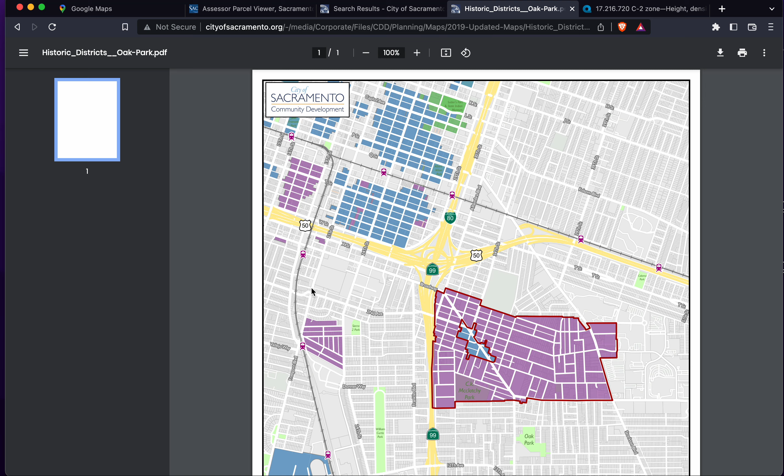If we look at this one, this is Broadway. There's this little triangle, and our land is somewhere here, and it looks like we are outside of this one. So not really sure, but it looks like we are.

The purple areas are surveys in progress, so that means there's no impact yet. The blue areas are the ones that have a historic guideline that's been adopted, and that's somewhere in this area.

Since we're far away from the blue, our lot is somewhere over here, I believe, or maybe here, so somewhere over here. I don't think we're impacted by this historic district of Oak Park.

If you look at this historic district maps, I don't see anything here about Stockton or Broadway, just Oak Park, so I think we're safe with historic district.

Historic districts affect building height, design, and everything like that. We could also look at business districts, so let's look at the business district improvement or design guidelines.

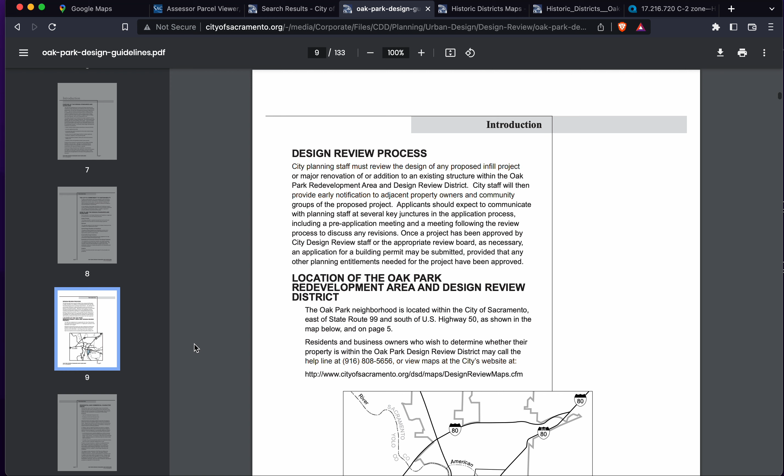Here you go, that's that one. That's too big, so here's Oak Park. Just look, maybe, oh here you go, here's another one. Our land on Broadway is somewhere over here, right?

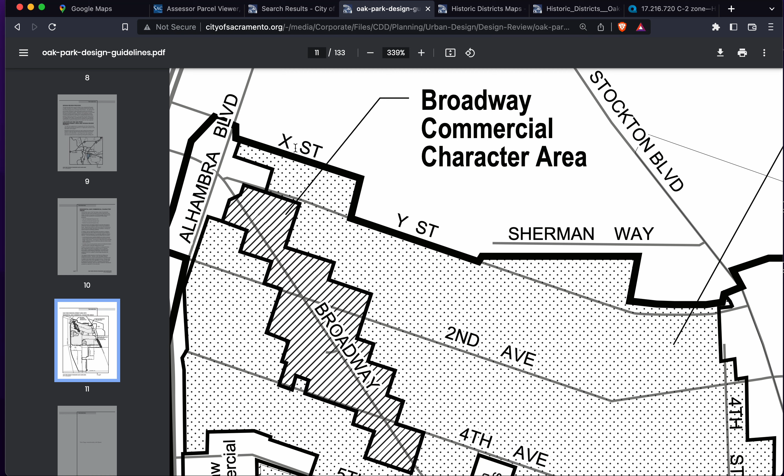It's somewhere over here, there's no other cross street here. So we may be within this Broadway commercial character area. Let's look at the Broadway commercial character area. So let's go back again.

Broadway commercial character is page 68, so let's go into this page and look at this one.

Let's use page 68... what page is this? Page 30 and page 66. So here's the commercial design guidelines, and we want to look at the Broadway section. Here's the Broadway commercial character area. You've got to read through this and look at the design guidelines.

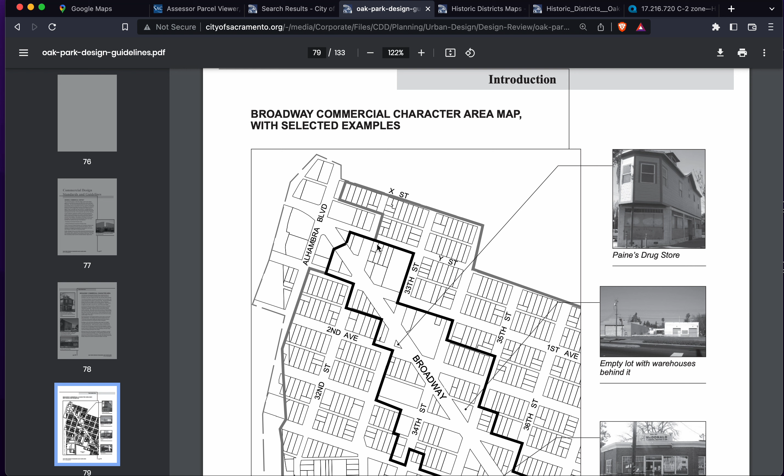So here's another map, and here is 35th, 34th is here, and our land, I believe, is somewhere over here. So I think we are outside of the Broadway district, since this dark area is Broadway and our land is outside of that.

So from Broadway, we got one, Y Street. If we look at our assessor map, here's Broadway, here's 34th, we got 2nd Avenue, and we got 1st Avenue here.

So let's look at 1st Avenue and 2nd Avenue. It looks like we are outside. So this is 34th, I believe. Here's 1st, this is the alley, this is 2nd Avenue, so our land is right outside of it. So it's not in Broadway. That means it's in Oak Park.

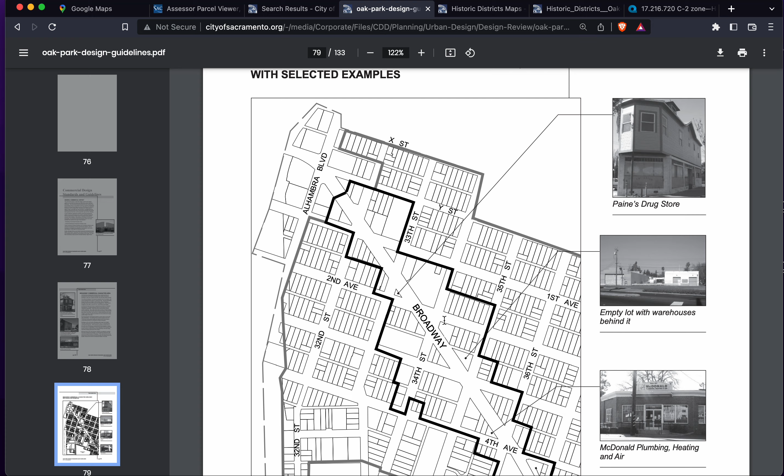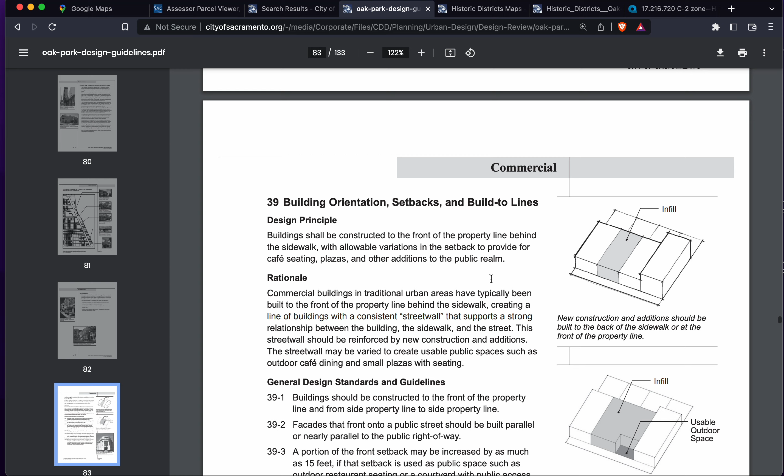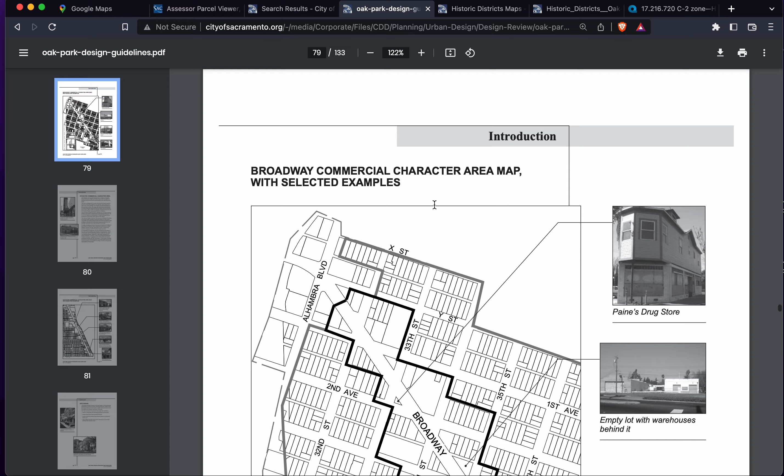So let's look at the Oak Park design guideline. I believe this is now Oak Park. So, Stockton commercial area. So we are not in the Broadway commercial area anymore, we are now in the Oak Park.

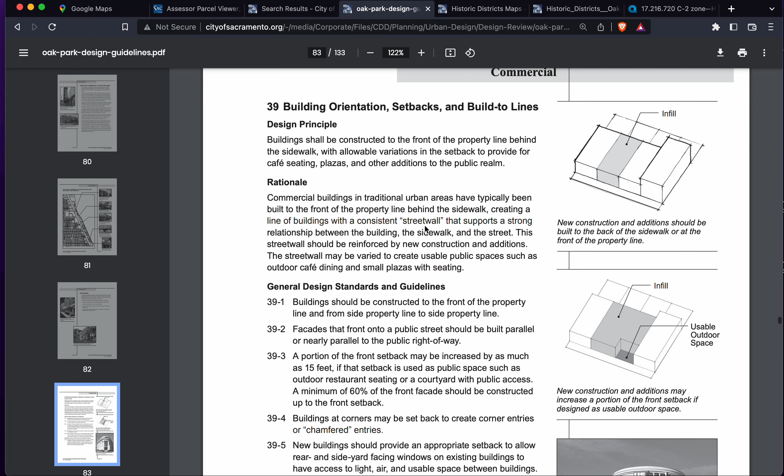So let's look at Oak Park building orientation. You can put usable space. You must directly address the sidewalk, but you can also do an outdoor usable space.

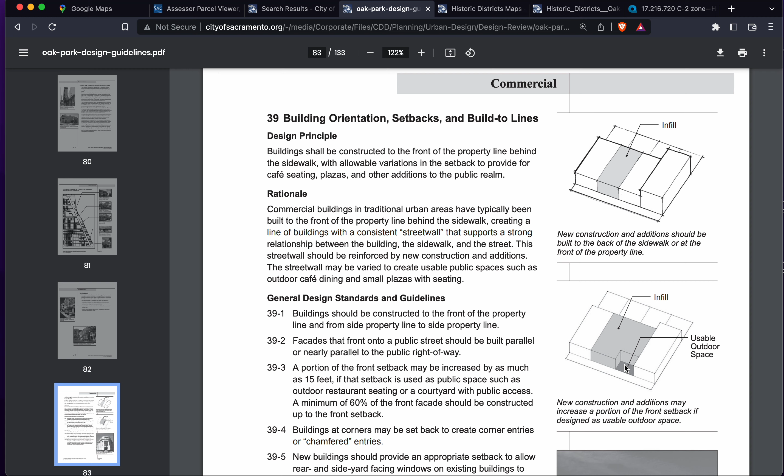Here are the design guidelines: buildings should be constructed to the front of the property. Facades facing the front public street should be built parallel to the public right-of-way, which is the sidewalk. A portion of the front setback may be increased by as much as 15 feet to accommodate restaurant seating or a courtyard. Building corners may be set back to create corner entries or a chamfer, meaning if you have a corner, you can have a 45-degree chamfer.

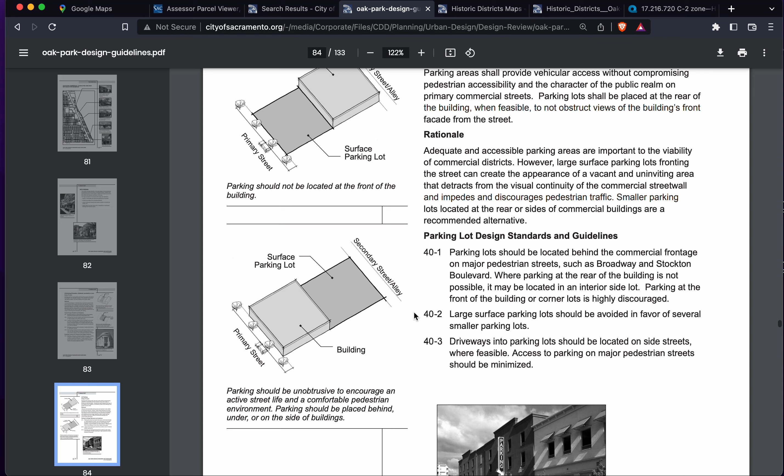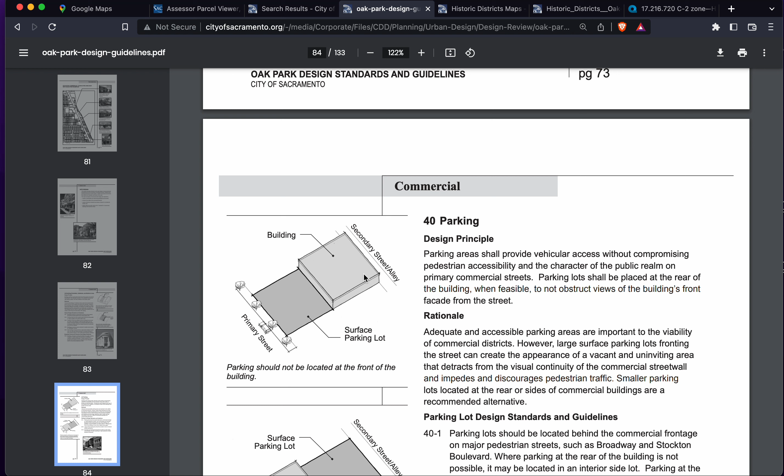Here's Broadway, and we also wanted to look at parking, since parking impacts our land, so we want to look at that. Parking says it should not be located at the front of the building, so we can't put parking there. We want to put parking by the secondary street or the alley.

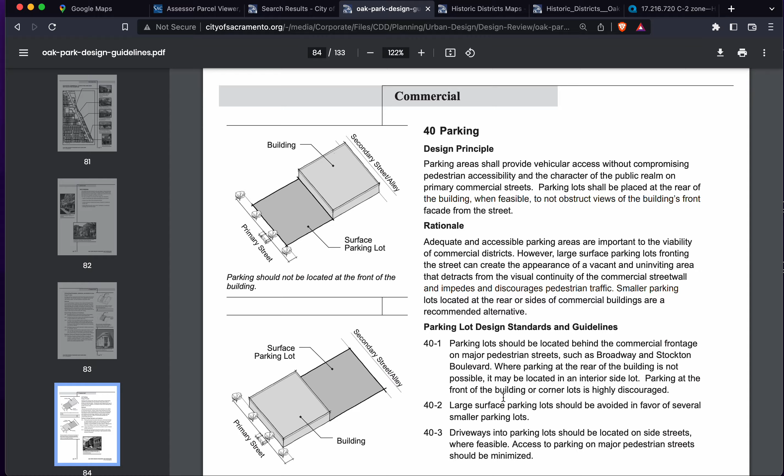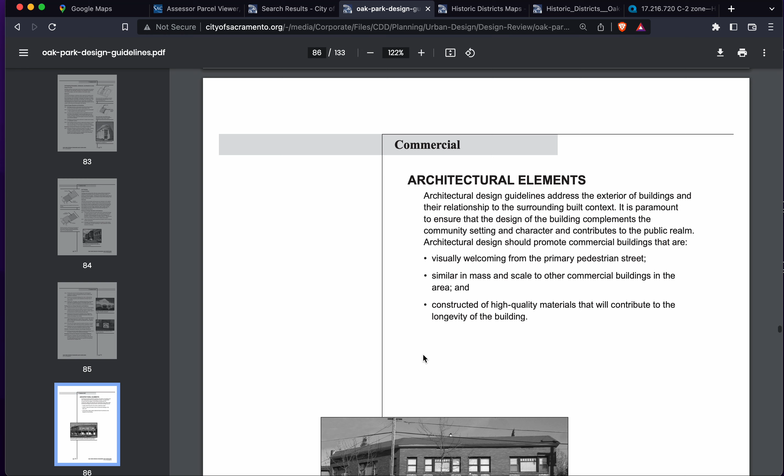Looking for building heights also. So, parking structure design guidelines, entry off Broadway. I don't see anything architectural, so maybe there are going to be some height restrictions here. There you go, building height, massing and scale. Does it say anything about the height? You have to read through this.

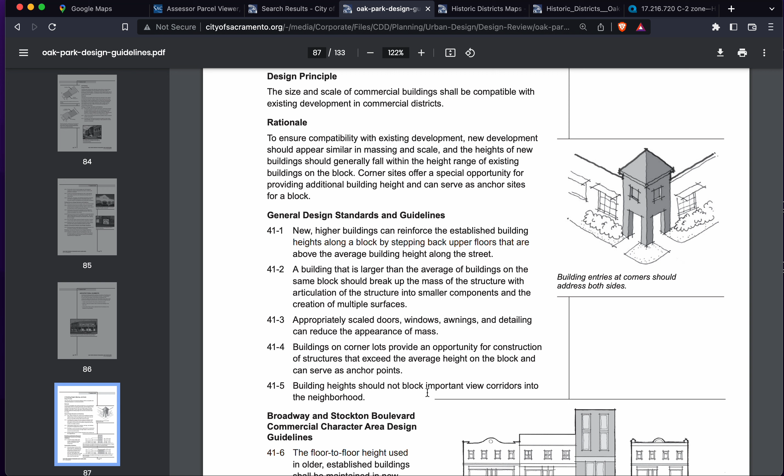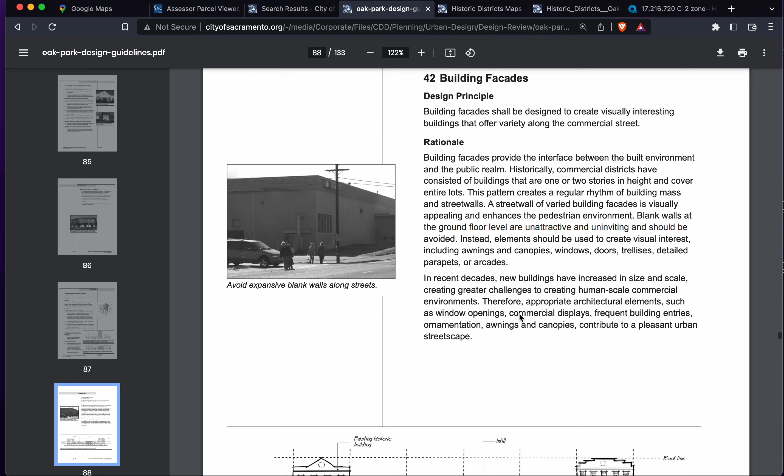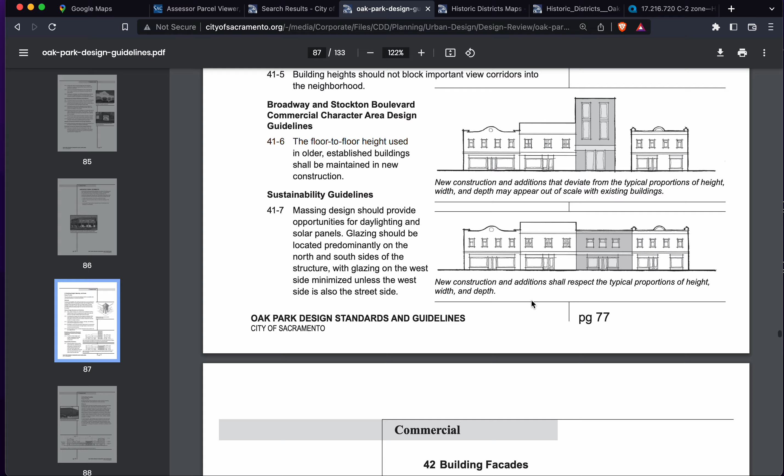It should not block important views. Floor to floor height used in older buildings, massing design should be consistent, building facades rationale. So it looks like, if you read through this, the height is basically going to be: don't go higher than something existing. I don't see anything that establishes a specific building height.

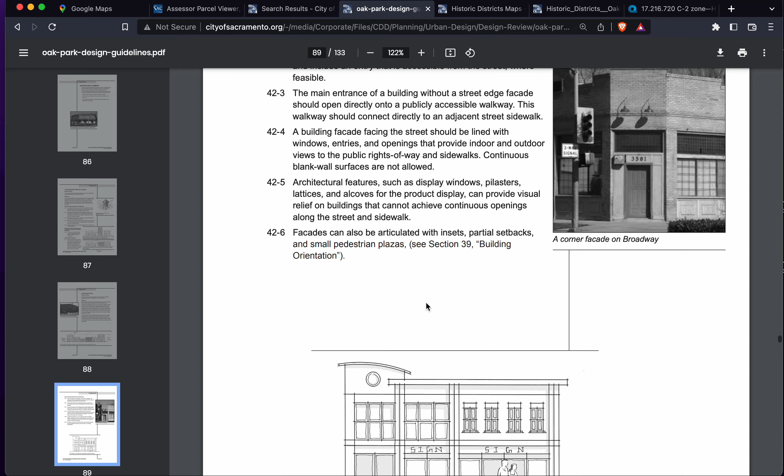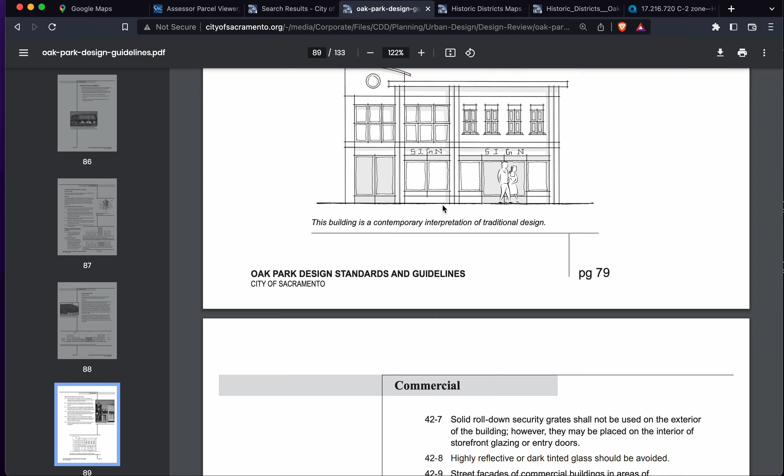So this business district does not limit us, but the C2 commercial zone does limit us to 65 feet if we are 80 feet or more away from residential. So you've got to look at the historic district and business district, since sometimes there are height requirements there.

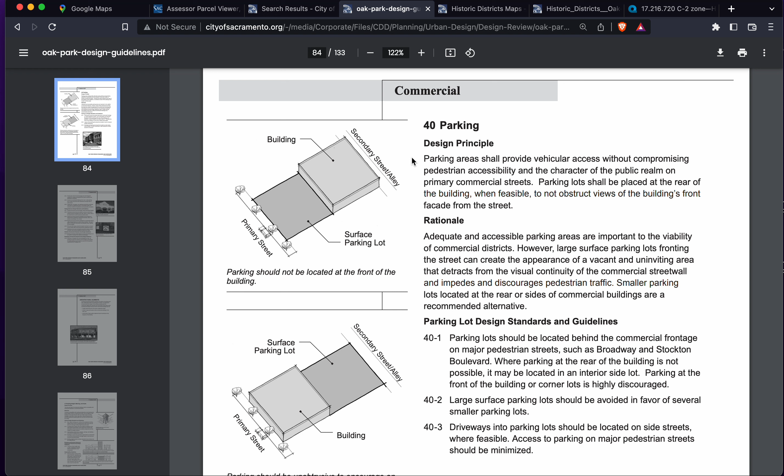I think the parking is important. It tells us we can't have parking in front of us; we have parking behind us. So don't forget to always check historic districts and business districts, as they could impact your lot.